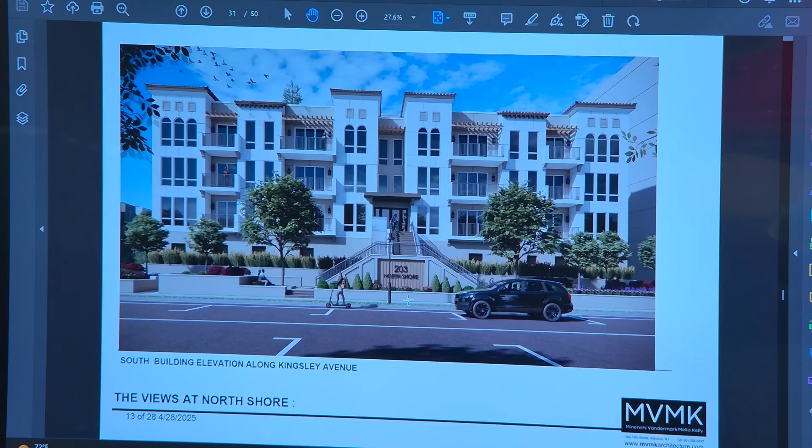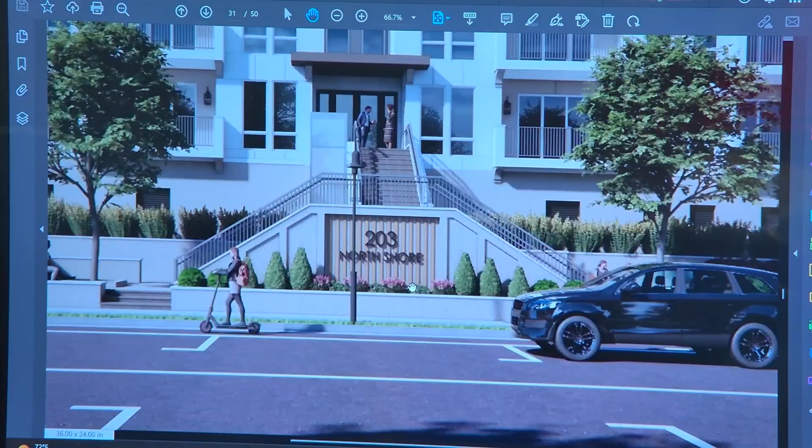We were asked specifically to show an address and do something decorative with what we were calling the trapezoid area in front of each building. You'll see in the packages that were resubmitted that that is what we did. I will note that they say 201 and 203 North Shore - those are just placeholder text. We're not exactly sure what the address is going to be, but whatever it is would be represented there. The decorative entrance was redone to put in the address, the Trex slats behind it, and planting beds for perennials and grasses in front, to really dress up the front, which is what the board had asked the applicant to do. That's the same for both buildings.

You asked us to provide a detail for the metal garage doors. That was also in the very last page of the package that was submitted. You asked us for renderings that show the taller plantings on the side. Those were submitted so that you have multiple sheets showing the side of the building and what the taller planters with the expanded openings and louvers would look like.

You asked us to add a sign for the architect. We indicated that if you end up approving this project, we would do that as a condition of approval, adding a plaque somewhere for the architect.

You asked us about gutters, and Mr. Curley is going to give some specific testimony today about gutters and how those will tie in to the stormwater system. You asked us about colors, which we are going to hand out to you.

I have the color samples. Yes, we'll hand those up front.

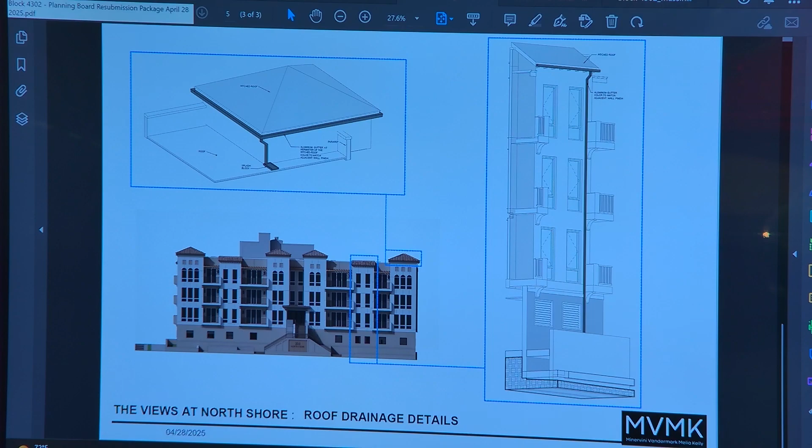And then from the roof, it would sheet flow to the scuppers, and those come down the side of the building. Correct.

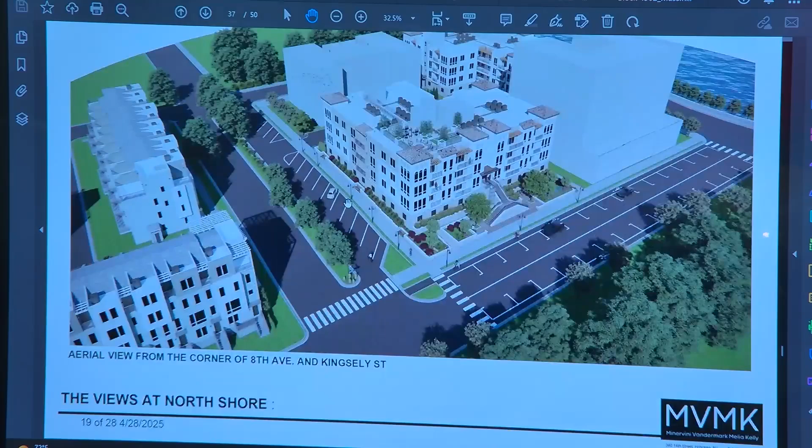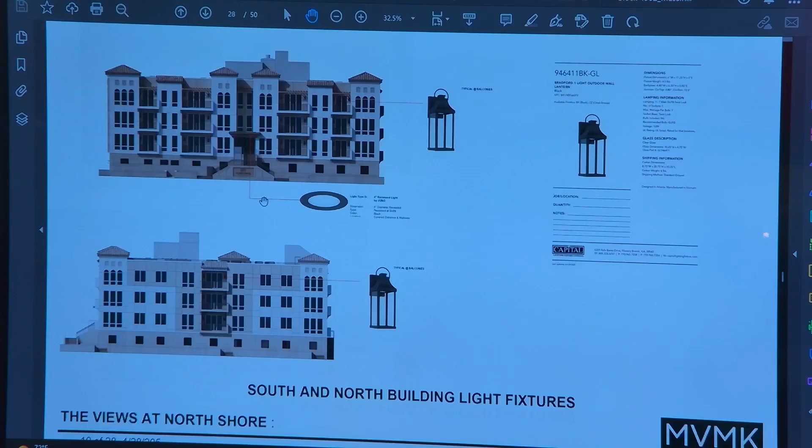Let's just, I think if you scroll down a few. Sorry, struggling here. So let me get the right view. I think it's on there.

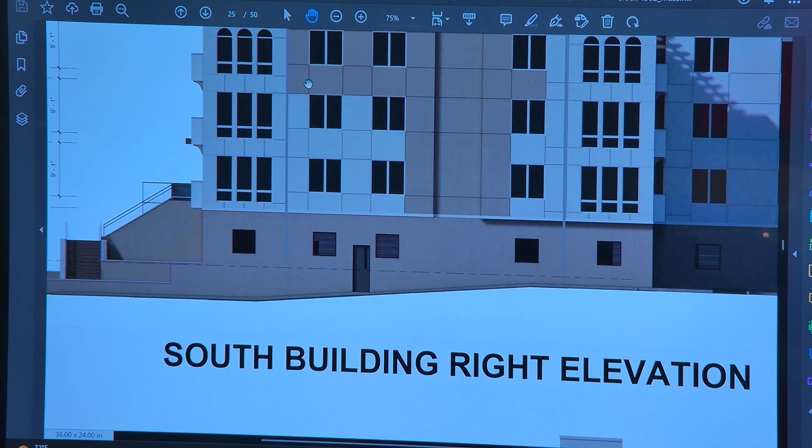There you go. So, and I apologize for taking so long to get to this. Because they are hidden so well with the coloration of the building, this is the gutter, or excuse me, the downspout that would come from the scupper down the building line, likewise at this point. And again, this is showing the gutter not changing color, but it will change color with the material facing the building.

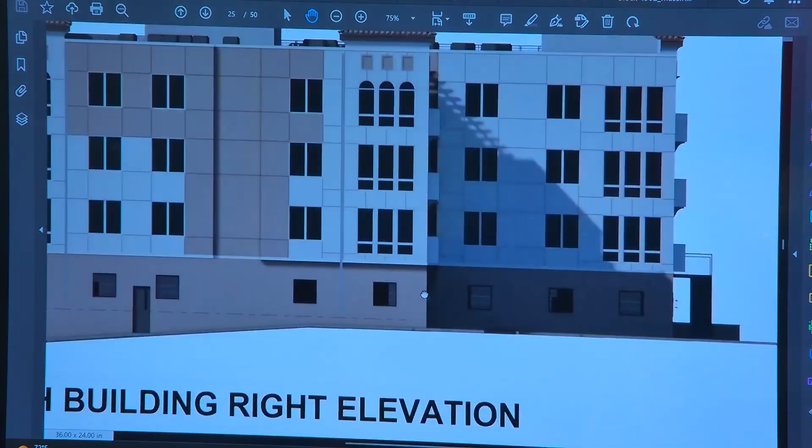And that all ends up going into the stormwater management system? That will tie directly, yes, it'll be hard piped. All of it goes right to? All hard piped, into the stormwater management system. And I apologize for struggling.

And I hate to make you struggle further, but, that's fine, so my concern is on the front elevation where those pergola roofs and the shed roofs, where the downspout is gonna come down. I'm on, what sheet is this, 13? 12, sheet 12 of 28. I think that's gonna show what I'm, yeah, okay.

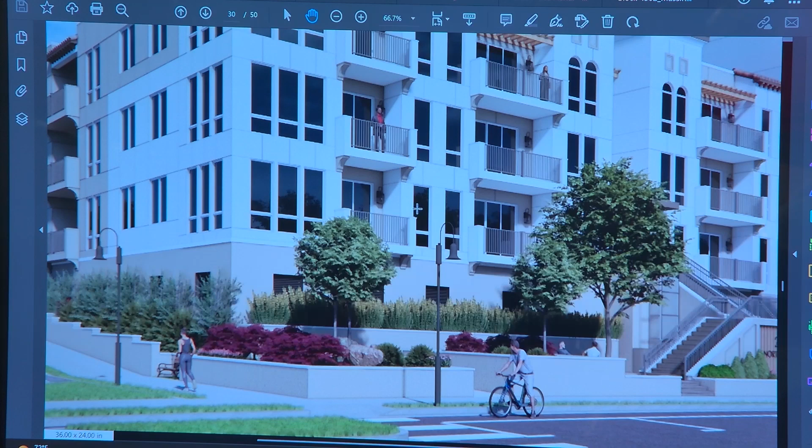If you zoom in tight on those balconies. Okay, and at the roof level, where those, so the gutter's gonna be on the, underneath those, wow, totally, the brackets. Wow, that did not want to help at all, okay. Correct. It will come, so down that little shed roof is gonna have a gutter right here, on one, and then a downspout on one side.

Correct. But these balconies, on the indented portion of the building, extend across the face of where that, so how is the gutter immediately coming down? Or how is the downspout coming down? I'm sorry? It'll be immediately adjacent to that, to the side of the deck.

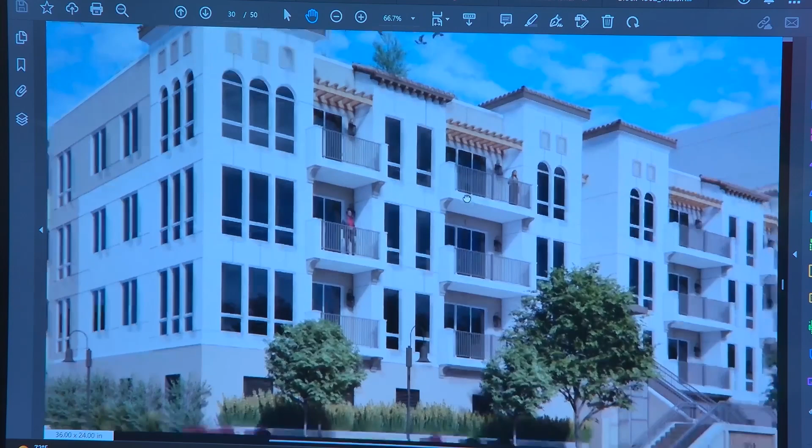So it's gonna be between the window and that ramp, okay, and then it's gonna come down, across the face down to the foundation level, okay, and into the planter. Okay.

So then, when we talked about this last time, I just have a question. The four big ones that are all the way around, we talked about draining them onto the roof. But I think last time we talked about, do those ones that just pour out, there's nothing underneath them except for plants, do we need a gutter there? Because it's going to have this extra downspout, down, as you said, it's going to kind of have to jigger down the front of this building around balconies. It's going to be a straight discharge, it won't have bends in it. I guess my question would be for you, in your opinion, do these need gutters?

These ones that- It is a pretty big fall. It's not a real lot of drainage, but there would be the potential for washout if it were to rain hard. Then you end up with a drip line where the vegetation's being. That's what we're trying to avoid.

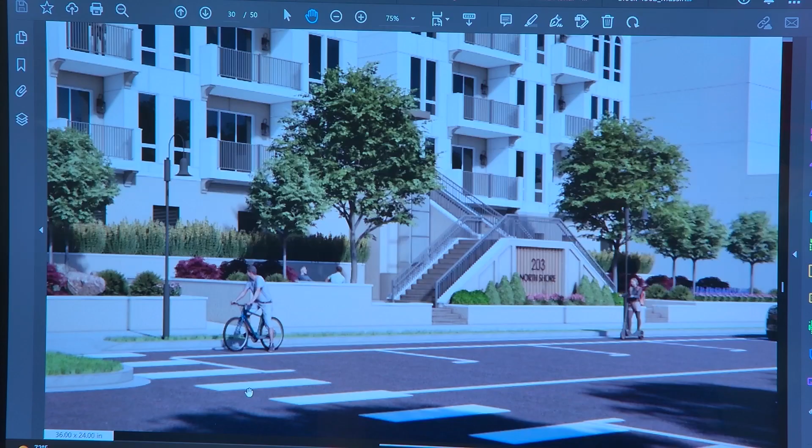So the next item in the CCH report was 1.2B, and that was a comment about revising the main entrance. So as I mentioned, we have submitted plans that show the revised entranceway with the address in it. Maybe if you could show the rendering, because that's where it's clearer. It shows the plantings, it shows the Trex material behind it that was shown on the sheet that was submitted, and the address. The address numbers, there's a sheet that shows you that they're metal numbering with a soft LED backlight behind them.

So, Mr. Curley, there was a note that indicated that the site plans had not yet been updated to incorporate all the features that are shown in the rendering, but as a condition of approval, you can update the site plans to match what's on the rendering, correct?

Okay, next we go to... I'm sorry, was the planter always there and it just didn't have planting in it previously? Or has the planter in front of the entrance been added?

My understanding, and Mr. Curley can correct me if I'm wrong, is that the face of the stairwell was indented a little bit in order to make room for approximately 18 inches of planting. Is that correct? That's correct. So, does that indentation mean the stairwell itself is narrower than it was previously? Where did those 18 inches come from?

That's a good question. There used to be stairs. The stairs used to go all the way across, just a step. There were, as you can see on either side of the entrance, 3 steps. So we had to have that distance, and we used that distance to make up where the planter is. So those 3 steps went all the way across before? Yes, that's correct.

Okay, thank you, I just had a question. I like the addition, I think that's an improvement for sure. Agreed. I'm just wondering about the plant list, which I know is a separate, unattached list. I do overall like the plant list, it's great for this project. But I was wondering if maybe some of the other species could be brought in here instead. Is the plant list set, is my question.

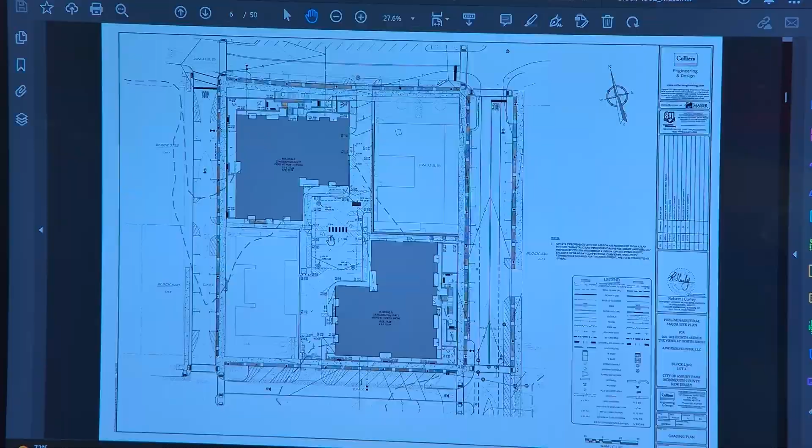So within the resubmitted package, if you could scroll up... I didn't know it's at the beginning. There we go. So we're working within the resubmitted package, and I think this is sheet 3 you're showing right now, correct? Or sheet 4? Sheet 4 is this, but I can scroll back. That's fine. So we can see here that you've revised the layout to have the crosswalk, to the best of your ability, line up with the loading areas and the sidewalk, correct?

Well, the crosswalk is aligned with the sidewalk access that would potentially go to the garage entrance on the side. So we relocated the handicap stalls from the corners and brought them more centrally located so that the handicap ramp could accommodate access right into the side of the garage. Now, there was also a comment that the intent is not for people to use those spaces and then go around to the front of the building to access the building, correct? That's correct. They would park in the parking field, walk up the sidewalk, and then into the garage. It'd be a key fob door.

Key fob lock. Great. Can I ask you a question? The crosswalk, thank you for adding that. Is there any reason it doesn't actually angle and directly connect the two? It leads into half of a parking space. What if the crosswalk was just a little bit angled? I can get that corrected. It's a drafting thing. If it's just a drafting thing, forget it.

All right, next on the list, we were asked to show... I'm sorry. So the garage, there's, for lack of a better term, a pedestrian entrance to the garage door on the side, and that's going to be key fob.

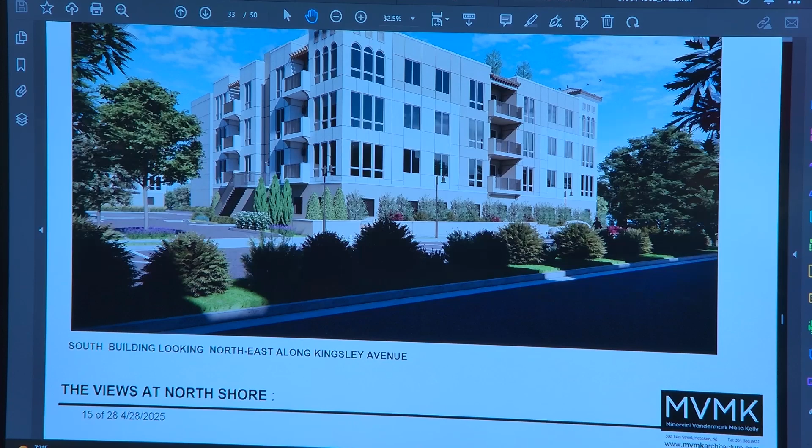Okay, but that's not the landscape plan. The landscape plan hasn't been updated to show the taller plantings. That's correct, Mr. Curley. If the board were to approve, would the landscaping and site plans be updated to correctly reflect the taller plantings? Yes, they would.

Remind me, are they being planted at that growth, or are they going to be planted and then take however much time to grow to that height? They would be planted at a 6-foot height. Great, okay, thank you.

Next on the list was the fence that we were asked to extend. If you could go back to your site plan. This is comment 1.2F. I skipped over D, by the way, because it indicated we had made the revision. 1.2F, the fence has been extended as requested.

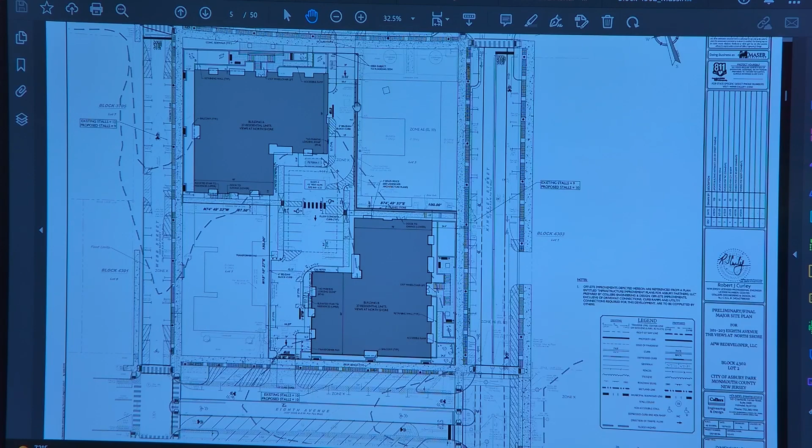So just point out where that fence was extended. Previously, the fence terminated approximately where my cursor is. And I'll zoom just approximately where my cursor is. We extended the fence to the far side of the Kingsley Arms. So it's the north corner of the Kingsley Arms is where our fence will stop.

Right, so the purpose of that, if I recall, was to ensure that any cars coming out of the garage would not interfere with the windows of the Kingsley. That's correct. Okay, right.

1.2G, we were asked to pass out a color sample, which we've done.

1.2H refers to the lighting design and then specifically refers to comments in section 6.1. So with that, Mr. Curley, can you talk about some of the revisions you've made to the lighting? And I understand you have an even further updated lighting plan, is that correct? That's correct. We'll mark this as A10, and this is the updated lighting plan.

Pass these out. So if I can summarize the comments that were made by both boards' professionals, there was concern first off of lighting in the access way, the sidewalk that we have on the north side of the south building and the south side of the north building.

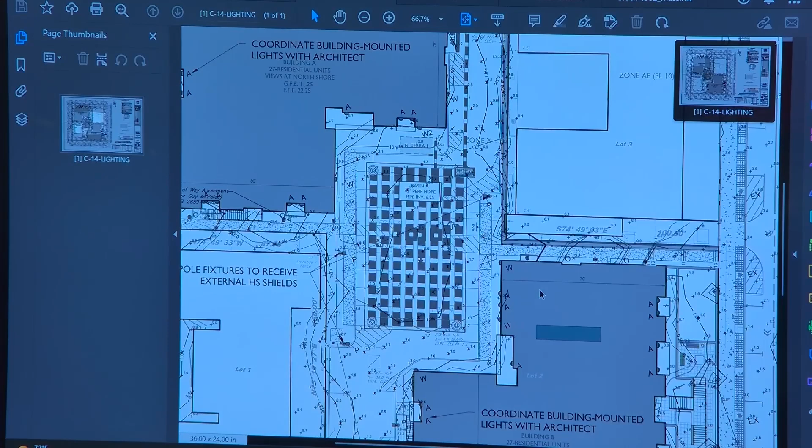The other concern had to do with the existing street lighting and the fact that the model we previously showed had lighting values that were within the building and didn't accurately reflect the light illuminating from the fixture and then getting blocked by the building. So what we ended up doing was remodel and utilize a different lighting model that just shows the foot candle values. I want the board to understand the modeling that we utilized.

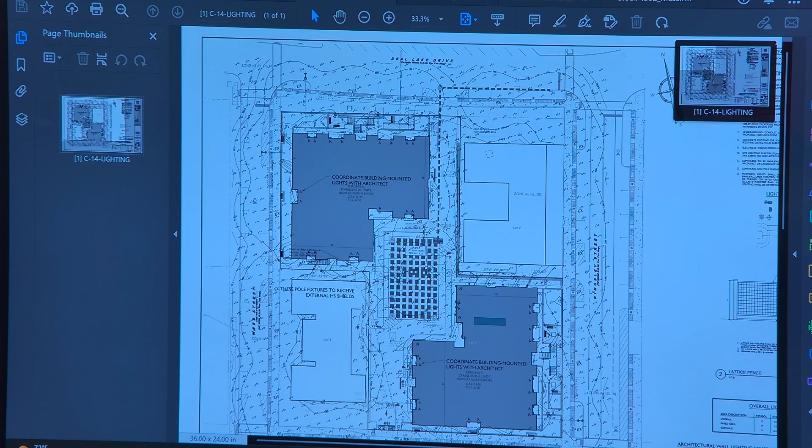There's 2 areas where we were having some difficulty trying to get the cutoff with the model that we utilized. The lighting files that come with these 2 fixtures, the P fixture, does not accurately reflect a cutoff shield added to the light. As you can see, the light values do spread out onto the adjacent property. This area is a patio area, and there's air conditioning units out here.

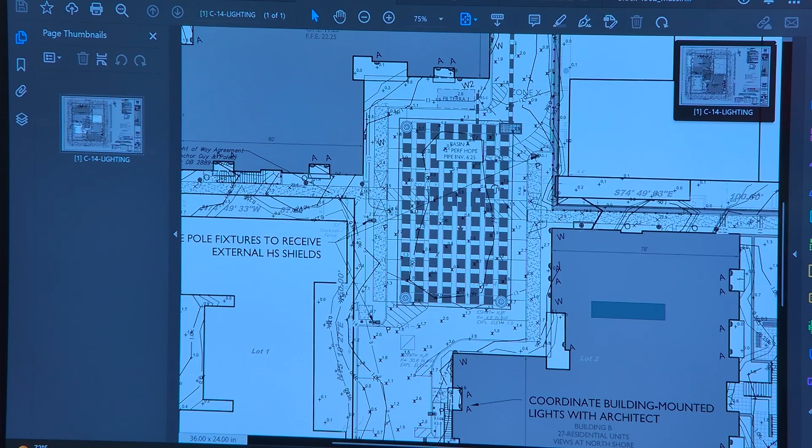What I will guarantee is that we will do custom cutoff shields for both of these fixtures, and we'll limit the lighting values so that there's no light shed on the adjacent property. The other item not modeled here is there's an existing 6-foot fence along this property line. I did not model this in the computer run that generated the light values, but that will also help shield it. Whether there's a fence there or not, I will make a custom shield for these two fixtures, and no light values will go onto the adjacent property. So in short, we can comply with items 6.1 A, B, and C of the CCH report, as well as the lighting comments in the Avakian report.

Is that correct? That's correct. And we will agree to revise the modeling accordingly to reflect the cutoff shields you just indicated, correct? That's correct. Bob, I can't make out the change to the Kingsley Arms, is that also coming down?

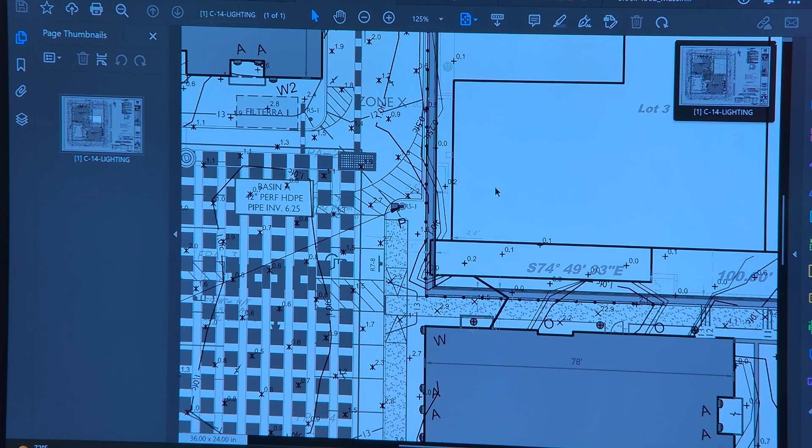It's too small for me, even with the magnifying glass. I have it at 0.2 in this area, and this is a shed area. 0.2, 0.1. And this 0.6 is from the light, that's a street light. And then that fence is only 6 feet high? That's correct, as we have it proposed now.

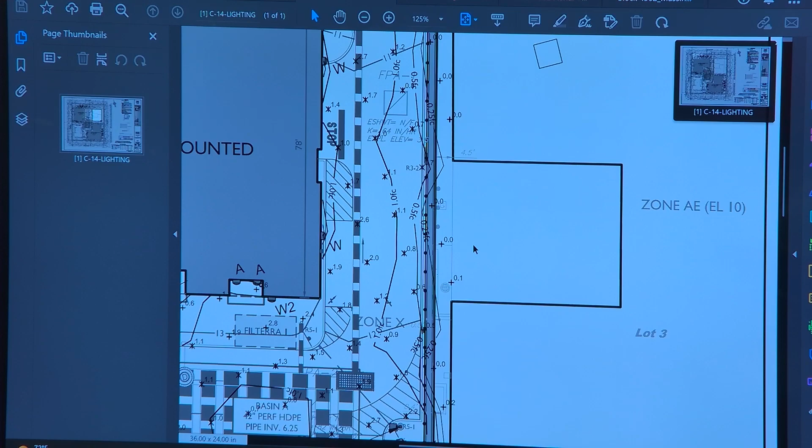Can we just review one more time what you just provided here, because we already have a lighting plan in our packet that we received. What is the difference between the two, because they are different? That's correct. We added the additional bollard lights in between the buildings, and we remodeled it. I used a different model because the one we used just had full circles, and you can see those circles actually going through the building, so it wasn't accurately analyzing the foot candle values that would have been blocked by the buildings.

The other question is more of a technical process question. I guess it looks like this was created on 4/28/25, which is the same date that the rest of the packet was created. So why wasn't that lighting plan included in our packet? Because it wasn't updated.

This last one is definitely different. I understand it's different, but they did not update it, but the revision dates are the same, so I don't understand. So I do apologize, there was supposed to be a revision with today's date on this.

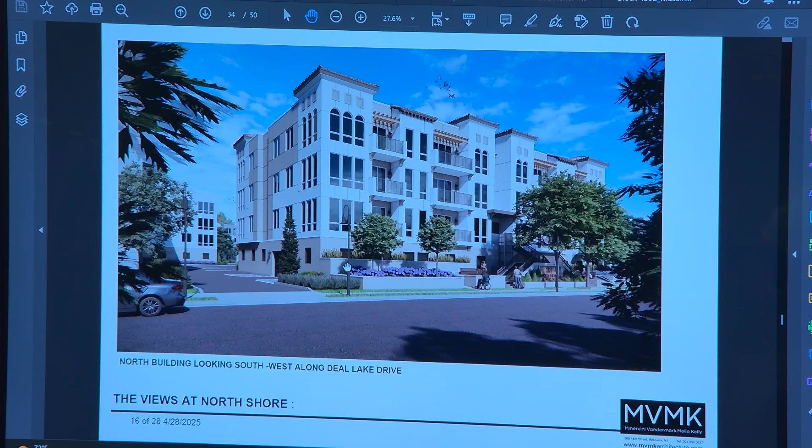And then that's also the case on the side of the other building, right? You can scroll up a few pages that shows that angle. Are the louvers decorative or are they actually ventilating open? They are open, they're for the ventilation. There you go. And again, we have the taller plants along here with the louvers.

Right, so those were all the comments from the - oh no, sorry, two more. 3.4, roof screening. And this takes us to one of the exhibits that we just had up. There was a comment in 3.4 of the CCH report for a request to add some screening to the rooftop mechanicals where they're adjacent to the neighboring buildings. There were two areas circled specifically in a diagram provided in 3.4.

And so, Mr. Curley, you previously introduced Exhibit A9, which was roof screening and drainage. I think the first page of that shows a screening mechanism, is that correct? That's correct. Can you just describe what we're looking at here? It's a louvered system, gets mounted directly to the roof, is elevated approximately 18 inches, and overall height is about 7 foot 4. That will help provide some visual screening for the rooftop mechanicals, and those screens would be placed in the locations closest to the adjacent buildings, that's correct?

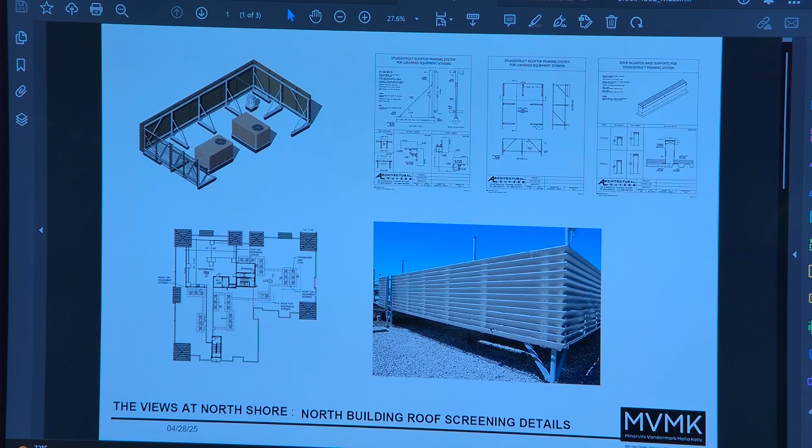Correct. Finally, I got a question on that. The ladder in the corner, is that just a step over so you can get into the mechanical space? That's correct. And is the bottom raised on the other side? The bottom is raised, actually, for the cross-section.

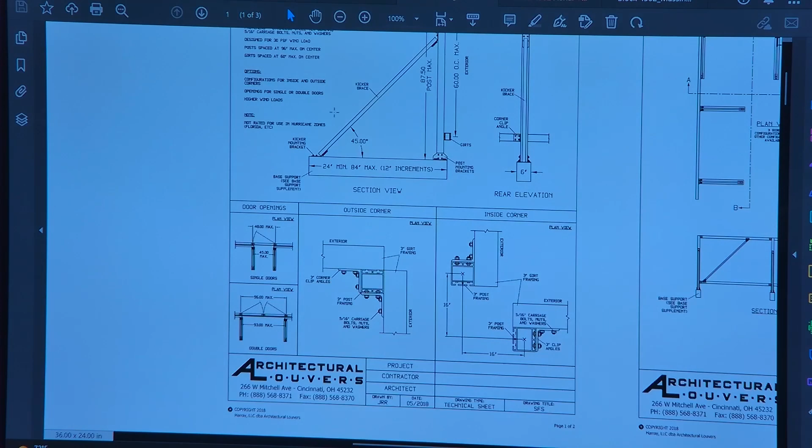I'll zoom in on this. The cross-sectional view shows the cross member that holds the louver system, so it is elevated off the ground just a bit. It's about 5 feet tall, but the total height is 87.5 inches.

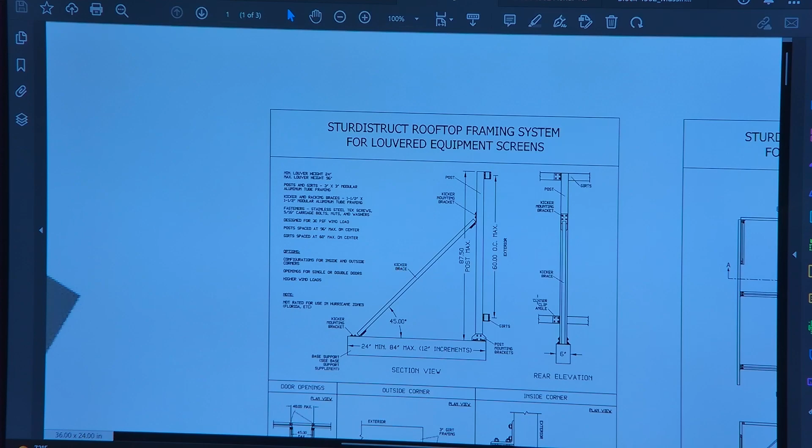Thank you. I have a question too. On the rendering, it shows 3 sides with the louvers. Is the 4th side the building itself? I believe the 4th side actually faces out towards the rest of the interior of the roof and away from the other adjacent buildings, correct?

And this shows the plan view graphic, which shows the location of where the screening will be. So in some locations they're just one-sided. Right, in some locations they're two-sided. That's correct.

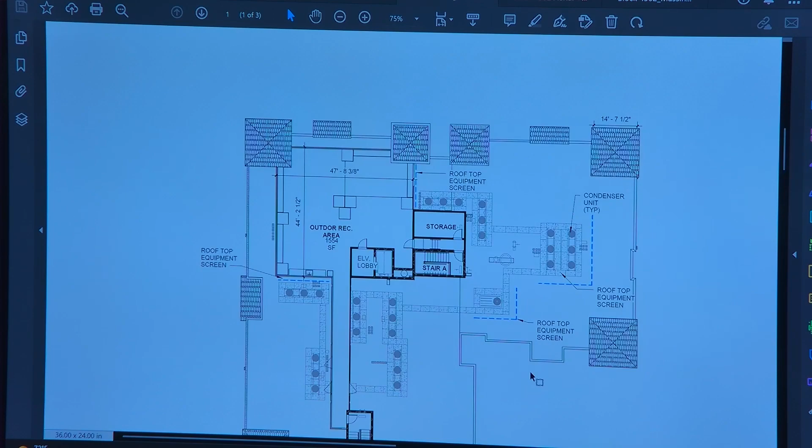Okay, I'm going to jump us back to 2.1 for a second, just about the retaining walls. Donna, was there something about needing to include limestone caps? That will be right about here. We haven't gotten to 4.3 yet.

Sorry, but we can skip ahead to that. No, we don't need to, I just didn't want to lose it. It's an easy answer. Mr. Curley, will the applicant agree to limestone caps? Yes. There you go, good.

Okay, so we've talked about the roof screening. All right, but wait, I'm trying to see the roof screen. 60 on center, okay, and then that's flush.

And I think we had testimony last time about this, but are the HVAC units themselves elevated on a vibratory cushion, or are they just on a pad? I believe they are on a maintenance pad, but yeah, other than that.

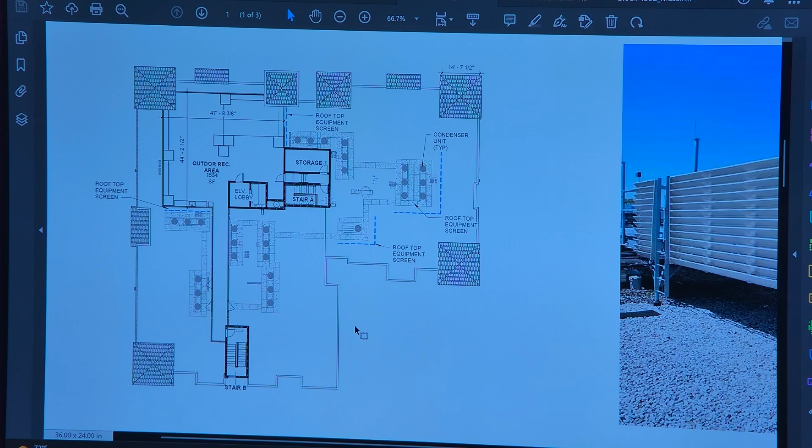Okay, last one for the CCH letter, and then we'll move to the Avakian letter. Utilities: there was a question, we had previously testified about where the utility meters would be located. This is in 7.2, and there was a question about whether we're sure those are the right locations and whether they would fit there, particularly with setbacks to windows. Mr. Curley, if you want to mark this one as A11, we'll call this the North Building, the meters location exhibit.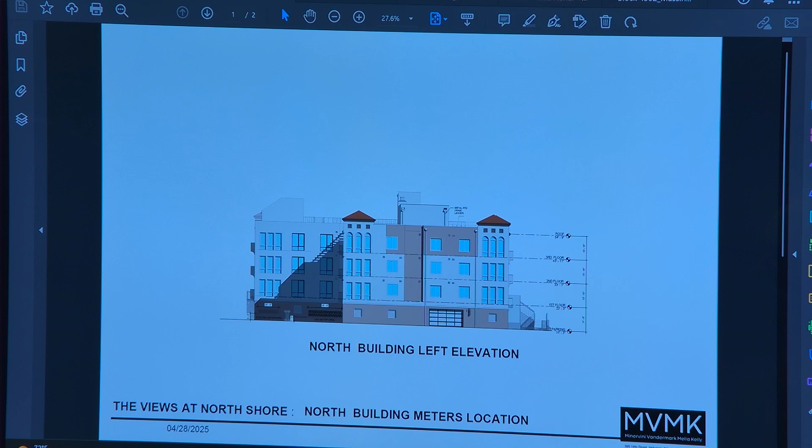There was also a concern about whether they were up out of the flood hazard elevation. The flood hazard elevation for this property is elevation 10. The lowest ground elevation immediately adjacent to both of the meters is around elevation 13, maybe a little bit higher, 13.2.

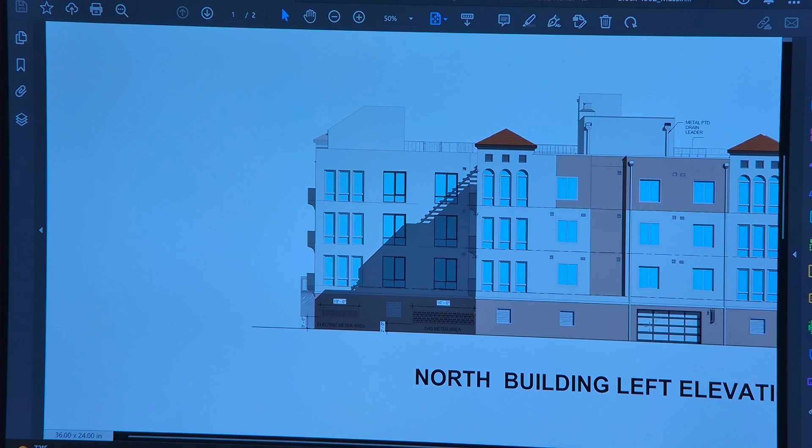I know it's in the shadow of the building, but you can see the electric meters and gas meters shown here on the north building. Here's the garage door entrance, south of the garage door. So they'll fit on the wall where we indicated they would go, and they're outside of the flood hazard area, above the flood elevation, correct? That's correct.

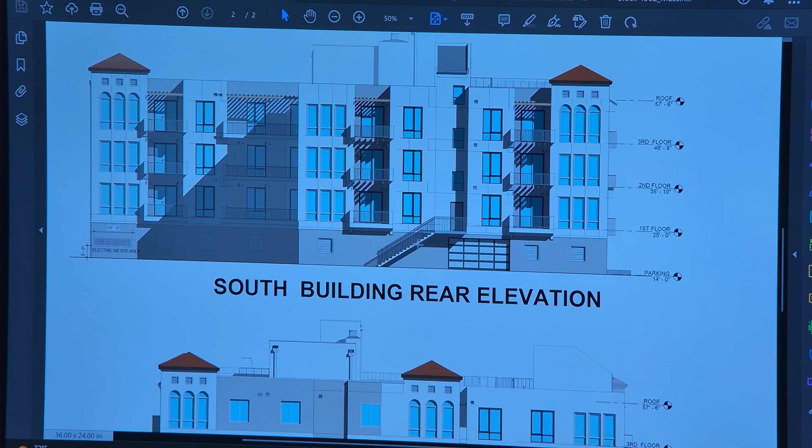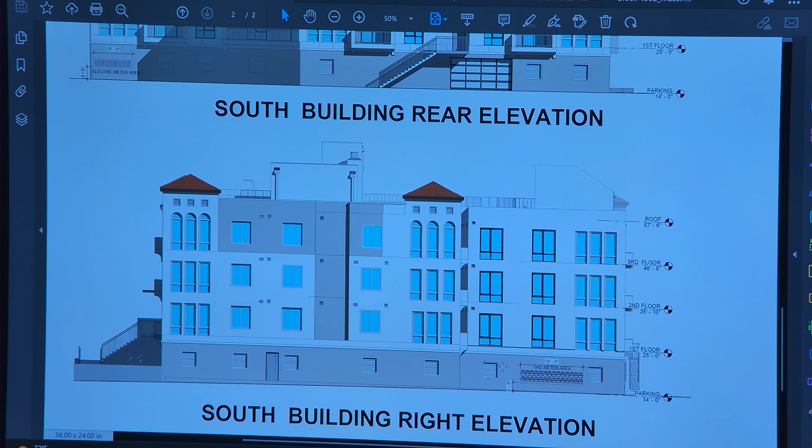On the south building, we have gas meters and electric meters on a corner. This shows the garage door again, and the electric meters, and around the corner on this view, the garage door entrance would be on the right-hand side of the exhibit. You can see the gas meters under their displays.

So New Jersey Natural Gas isn't going to consider the garage openings as windows? No.

So that was it for the CCH letter. We do have a handful of things to address. I have a couple more that we should hit while we're there.

4.4, on streetscape, it says neither the site plan nor the landscape plan show the street trees. Is that going to be changed? The street trees will be done in accordance with the infrastructure component report. So that's part of the master developer. Okay, they'll do the street trees.

Let me just look. Also, how about 6.1 under C? I'm assuming that's probably mentioned for all of A, B, and C. The lighting, yes, the bolded part under there. Yes, we will agree that the lighting plan has been revised and will be further revised in connection with Mr. Curley's testimony. It'll be further revised for this. Correct, okay?

I guess we'll deal with refuse later, because it says we don't know if there's sufficient refuse, 7.1? I thought, frankly, we had testimony on that from the architect. So it hasn't happened yet? No, I think at the last meeting there was testimony about the trash rooms and how it would go from each floor down to the rooms shown on the floor plans. So we've determined that there's sufficient? That is what our architect determined and testified to. All righty.

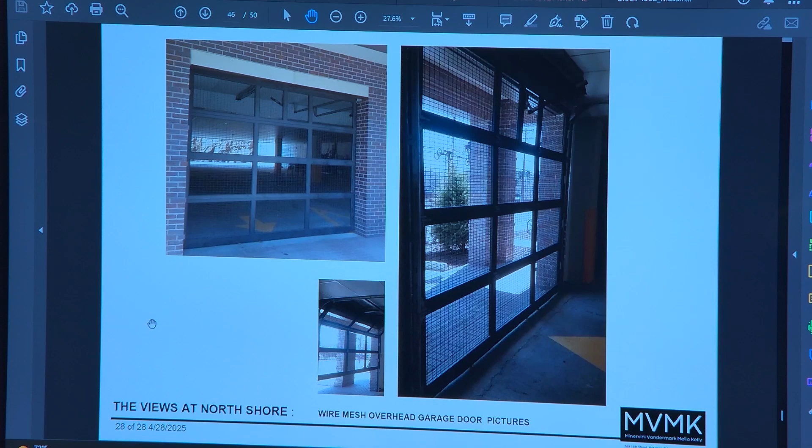So I believe it is a wire mesh, is that correct? That's correct, to allow for light and air. So it has a frame to make it look like panels, window panels. As long as there's no view into it from the streets, so the public isn't going to see the lights, then okay.

The garage doors exit onto the interior, and this is one of the areas where we added that extra fencing so that it would be protected, blocking lights. And also the stairwells - we had spoken about making sure that things are shielded so they are not directly visible to the street, so that we're not having the lights visible to people walking across the street.

We had a condition that emergency stairs would be on a motion sensor, inside the building. Is that already in, or do I need to add that? No, we're going to add that as a condition, because we're keeping track of the conditions as we go.

I had a question too, I lost track with the last version. I apologize, but the taller plantings that were added, I think on the website, what are those? They look like... I don't know if they're drawing this. Are we having a landscape architect, or no?

I know he had previously testified as to what they were going to be, and that didn't change. Oh, I thought there was one that said it was going to be taller or something. Oh, we just didn't see them last time on the renderings. Right, so I can look back at the one from last time to see, because it's different on one side than the other. It looks like arborvitae or something on one side.

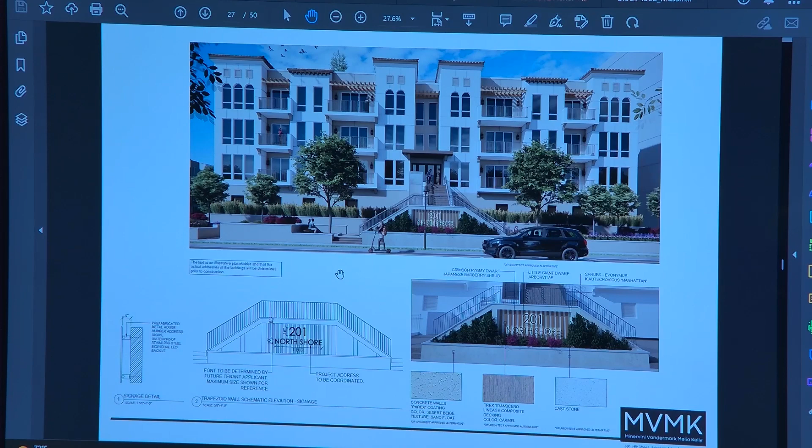Okay, I want to talk about landscaping, I have one that's a weird one. On the south building, the trapezoids, you guys redid them, and I think they look really nice now. On the north building, that trapezoid entrance of the building is really obscured by two trees. I know the city council wanted these trees between what we were calling the trapezoid and the sidewalk. My question is, did the city specify exactly where those trees had to be? On the south building there's trees, but they're outside the little stairwells. On the north building, they're inside the stairwells, so you block the entrance to the building on the north side. If those trees could move out on the north building, you wouldn't obscure the view of the entrance.

So I will tell you, those two trees are in the right-of-way, and the location was specifically approved as part of the subsequent developer agreement. So I would hesitate to offer up moving them. The city has already approved their location, and they are within the right-of-way, and that was approved. The only reason I bring it up is because you made the entrances look so nice and then it kind of covers it up. But I also love that there's extra trees, those two in particular we don't have as much flexibility with, because that was part of the approved agreement.

I have a quick question, to go back to the utility meters. Is there any way to shield them? I know you need access to them, the utility companies need access to them. I ask because where I live at the Cove, it's a very attractive development, which is one of the reasons I purchased there. But on each of the three buildings, there are exposed meters and they're not attractive. So I just wanted to see if there's any way they could be shielded.

One of the considerations for the placement of the meters where they were physically located was so they wouldn't necessarily be seen at the street level, so if a pedestrian was walking past, they wouldn't see it. Obviously, the homeowners that live in the development will be seeing them on a daily basis. As far as trying to cover them up, maybe there's a little bit of leeway with the electric meters, but with the gas meters, they do not want them covered at all. Okay, I just thought I would ask.

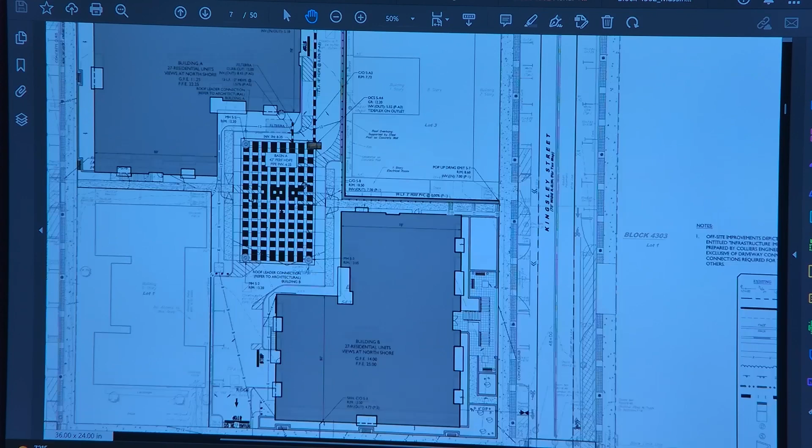Okay, so those are all the questions that I had for Mr. Curley as a way to bring everyone up to speed on the changes that were proposed and any additional changes. I know obviously we'll open it to the public just as a preview, we just have one more witness after this, and that's Mr. Barry, our planner. All right, who would we talk to about the on-grade parking?

Mr. Curley? Yeah, the parking? Yes, Mr. Curley. Okay, on number 9, on-grade parking, in the Avakian report, I see that the parallel parking stalls are 7 feet wide. Not that wide, not too wide. Is there anything we can do about that? Because it seems a little short.

What's the width of the drive aisle adjacent to those spaces? Do we know? I will say, even though it doesn't apply because we're in the waterfront redevelopment, the zoning code in Asbury Park does allow for parallel spaces to be 7 by 22. So I think the size proposed for the parallel spaces is the size permitted by the zoning code, even though the zoning code does not apply in this instance.

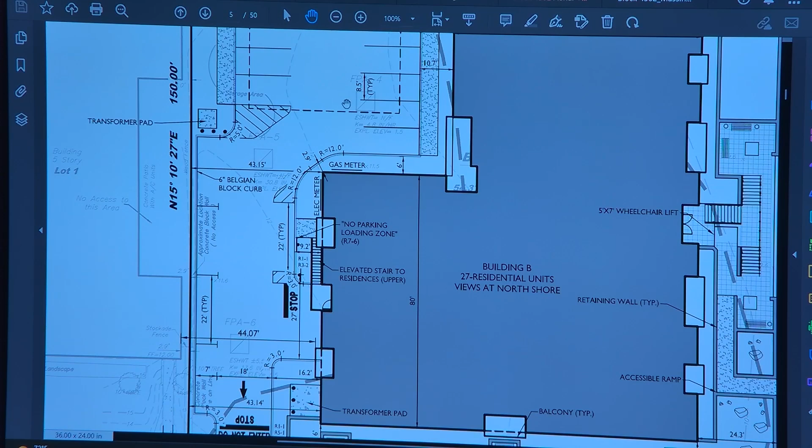The drive aisle is 18 feet in width, and it's a one-way circulation. That's the drive aisle immediately adjacent to the parallel stalls, so it's narrow on that one side. In the area where we have 90-degree parking, the drive aisle is 24 feet in width. All right, since it's going one way, okay. So you're probably going to the floating side, which would be 16 or 15, which is still wide enough. Okay.

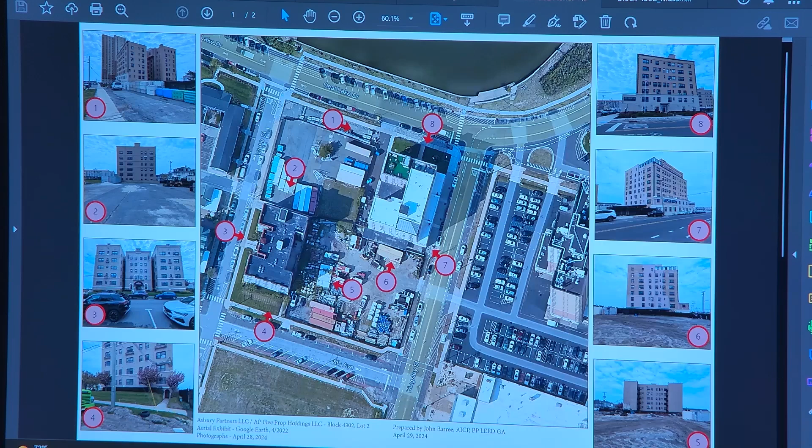So just working around counterclockwise from the northwest corner of the site with the numbered viewpoints here, we have a view of the west side of the Kingsley Arms building, a view of the north side of the Miramar, a view of the front of the Miramar from Webb Street, a view of the south side of the Miramar, and then a few shots from within the site of the east side of the Miramar and south side of Kingsley Arms, and then a shot of the corner of Kingsley Arms. So you can see the context of the surrounding buildings, which in our oddly shaped development site running through the middle of the property. Some additional photographs give some context of other surrounding buildings, just some of the architectural style of the buildings in the neighborhood, both a variety of ages, over the last 80 or 90 years, really. We've had a few different projects that make up the neighbors.

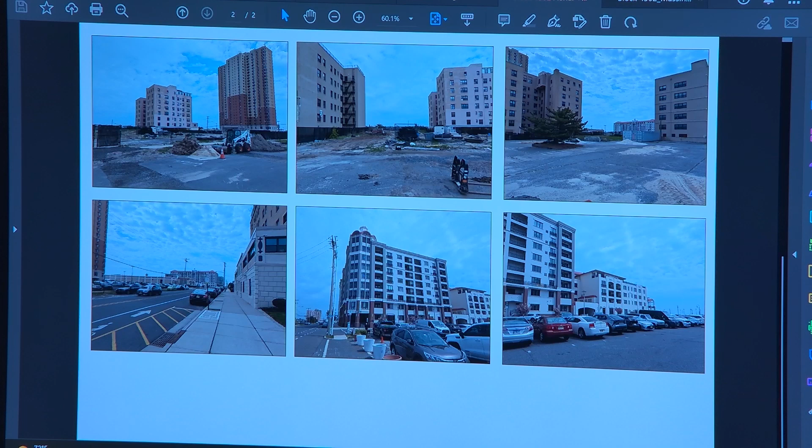The other exhibit that I prepared, we'll mark this one as A13. This is a massing model meant to show the full build out of the site as what's permitted under the waterfront redevelopment plan. So the plan permits 8 stories on the 8th Avenue and Kingsley Street side of the block and 6 stories on the Deal Lake and Webb Street quadrant of the block. And so the existing buildings are roughly modeled in here for context to show what full build out of the block would look like.

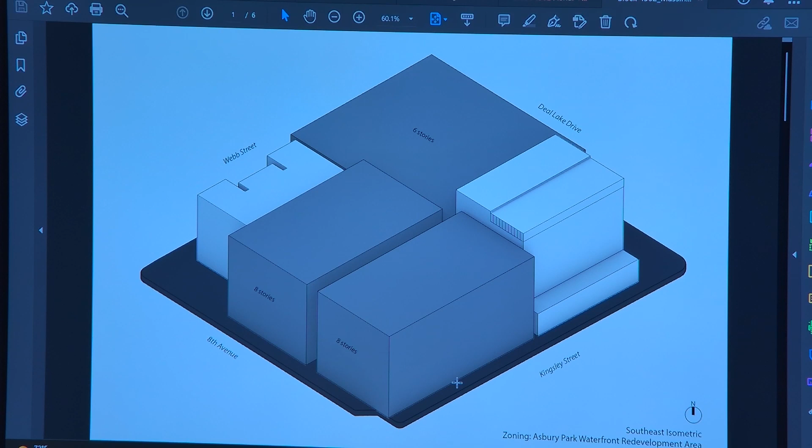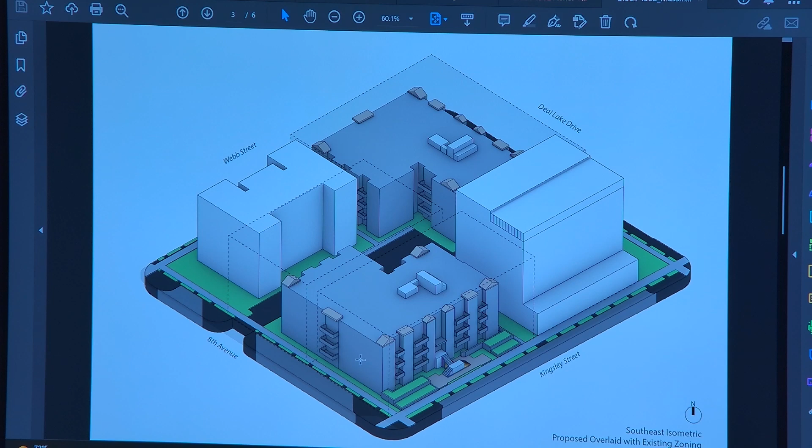Okay, so we've heard a lot about all the different details of the project. There's a lot of what I would characterize as groups of different relief that we're seeking here. The waterfront redevelopment plan, as the board is well aware, has some very specific standards. Starting with things related to the architecture of the buildings, we have 4 items related to balconies.

There's a requirement that balconies be masonry or wood. Wood or metal, and we have masonry balconies with metal railings, so it's a more durable material, doesn't really detract in any way from the aesthetics of the building, and in fact the masonry finish is consistent with the remainder of the building's design.

There's also a requirement that balconies not exceed 3 feet in depth. We had a conversation about the relative merits of different styles of balconies during the architecture testimony. In this case, the depth is granted by the inset of the building, so they are more than 3 feet of usable space, but they're not projecting from the building face more than 3 feet, providing a usable exterior space, which is certainly an amenity expected in modern development such as this.

The next category under balconies is that we have multiple balconies. The plan calls for a single wrapped balcony when they are provided. In this case, that would certainly interfere with the architecture and the push and pull that we get on the facade with the bays if there were a single balcony. So the breakup of the balconies, both in form and function, lends themselves to the building.

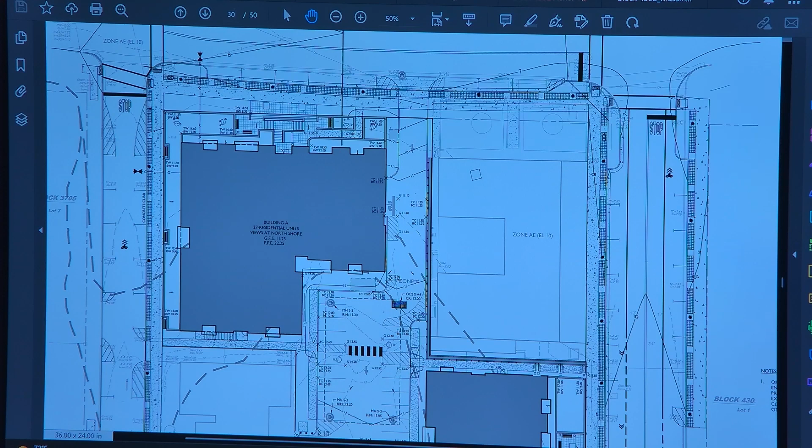The next four items are related to windows. We have windows that are fixed, really only a small number of the windows that are fixed, not operable. The majority of the windows on the facade, bring up the... the larger windows you see are operable casement windows, and then the smaller accent windows are the fixed ones. So an intentional design choice here, and if these were operable, they really wouldn't be practical.

The windows are flush to the surface of the building. They're not supposed to be. You heard testimony from the architect about some of the practicalities with modern energy code and modern building materials. There are advantages to having those windows be flush, and so that's the style being proposed. It certainly doesn't detract from the aesthetic.

And then we don't have windowsills, which are required. A similar reasoning behind the material options we have available and are choosing to use with this project. That concludes windows. So next we have some conditions related to the building base and placement.

We've had a lot of conversation about how the base of the building is being treated, how the building is related to the street frontages. The plan talks about having articulation and a meaningful relationship to the corner of the block and emphasizing entrances.

Certainly with the front, we have an entrance that's being emphasized. We've had a positive redesign of the trapezoidal area at the base of the stairs to both add architectural interest and landscaping to soften it. That was certainly in response to good commentary from the board, and I think it has enhanced that frontage significantly.

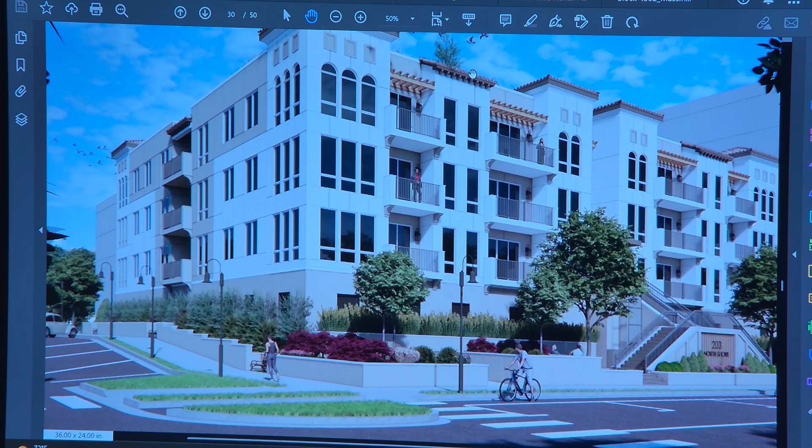There is a stair tower and elevator overrun back there somewhere, which you can't see from this rendered view, nor from the head-on view. So the screening that we've enhanced with the rooftop mechanical equipment helps screen some of the views from above, to the benefit of the project. Additional modifications to the stair tower wouldn't really bring us any closer to achieving any kind of visual character from the street because they wouldn't be visible.

So we need that relief, but I think we've balanced it well with what's been proposed with the additional screening.

We have one related to signage. The proposed illumination method is a backlit LED light, so it's considered an interior illumination because it's backlit. It's not a glowing letter, it's not a light box or anything like that. It's a soft halo kind of light. I don't think it detracts from the project at all.

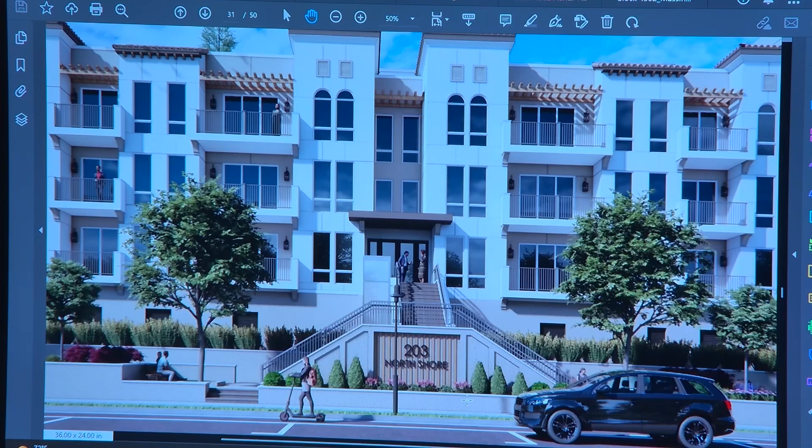I think the design mixed in with the material shifts in the inset here, along with the landscaping, actually probably creates a better aesthetic than if you had an external light that would end up getting blocked by landscaping as it grows and evolves. So I think relief is needed, but it's a better alternative for this design.

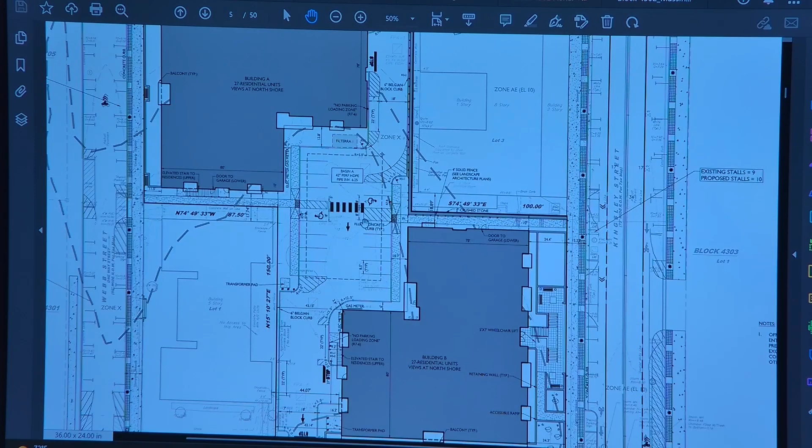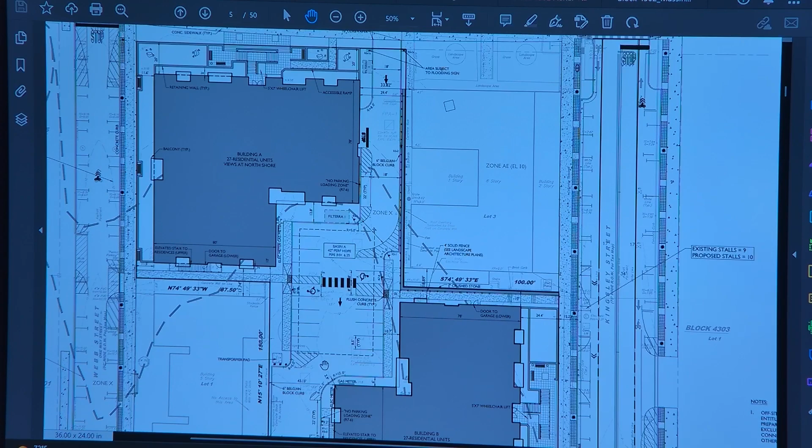We have a few parallel spaces, total of 22 through the middle of the site. So technically it may apply. There's very limited space available. There are these two striped islands, but they're needed to maintain the grading and drainage patterns, I believe, and also give some flexibility in maneuvering through the lot. So it would be impractical to add any additional landscaping through what's essentially an active drive area.

That is it. So the standard for granting these waivers, if you could just explain that briefly, and in your professional opinion, have we met the standard? Yeah, so these are design exceptions for the redevelopment plan. We're looking at practical considerations, and whether the site can appropriately function as designed.

A lot of these items have been discussed by the other design professionals. They've been modified. We've been constantly tweaking throughout, leading up to the hearing and throughout the hearings. And I think we've come out with a good set of compromises. Ultimately, the relief is relatively minor in the scheme of the overall project.

I think the design, the architecture, and the engineering that you've heard about will bring a good product to the site, to the city, and there'll be no substantial detriment. We've gone to great lengths to ensure that the lighting, the drainage, and the various aspects of the project are being managed so that the neighboring buildings can accommodate the new development as best they can.

Thank you, Mr. Barry. I have no further questions for Mr. Barry. I just wanted to mention that I don't know if we can bring this in as an exhibit, what is essentially what you just read off.